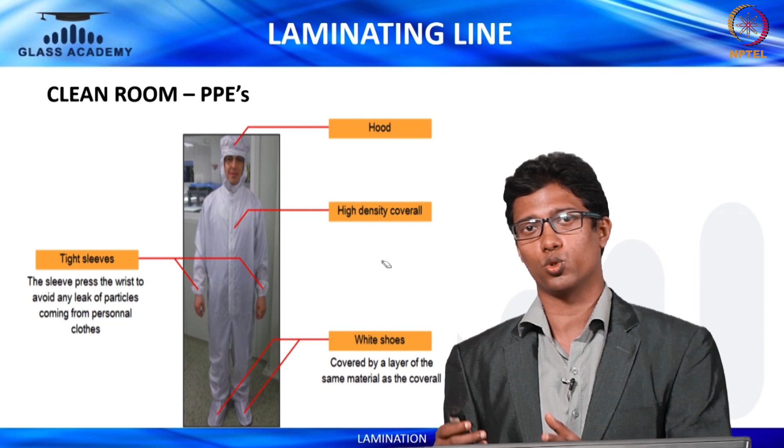Basically what we are trying to convey is we all wear our clothes, and there should be a room where the PPEs are kept. The person goes there, changes and wears that PPE, and then goes inside. It's just a medium before entry into the clean room, trying to ensure we don't contaminate it, since the atmosphere has a lot of dust. This is an arrangement to ensure double protection against contamination of the clean room.

For clean room dust control, we have a standard which is the US Federal 209E standard that we follow. An ideal condition for a clean room is normally ISO Class 7 or Class 10,000, wherein we use this handheld meter, model 3013, shown on the right side.

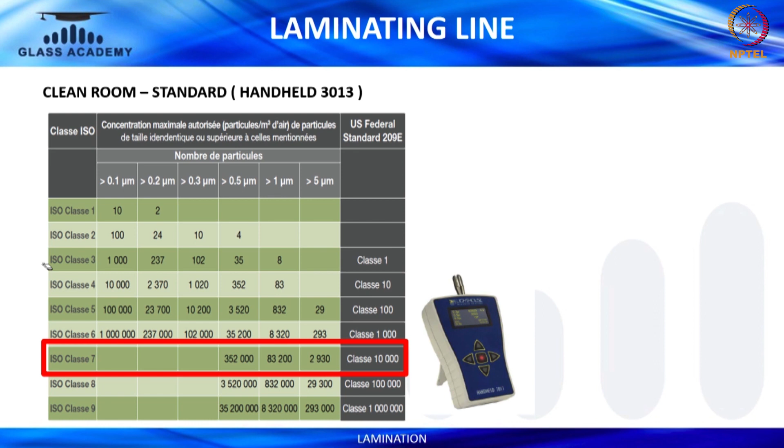You keep this meter in the atmosphere, and when you start it, it measures particles of size 0.5 micron, 1 micron and 5 micron. Normally we recommend running the meter for 20 minutes, and it takes a reading every 1 minute, or it can also take readings every 30 seconds, depending on what you set.

Normally we keep 20-minute readings, taken every 1 minute, and average all those readings. The 0.5 micron particle count should not exceed 3.52 lakhs. For 1 micron particle size, particles greater than 1 micron should not exceed 83,200, and particles greater than 5 micron should not exceed 2930.

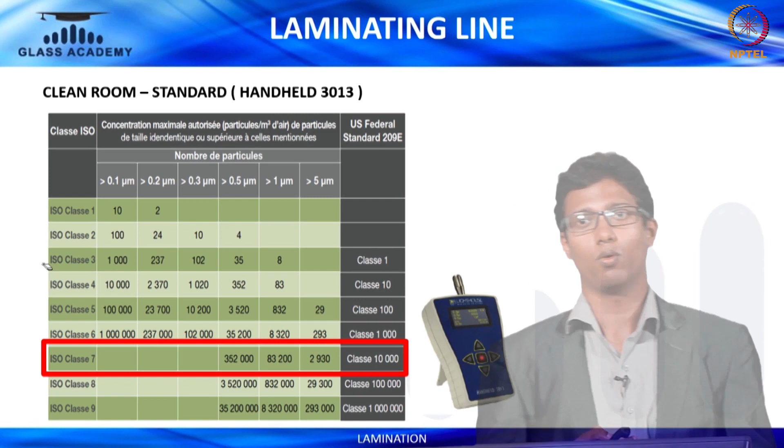This is the standard for maintaining a clean room, and it is also the standard maintained in hospitals and pharma manufacturing setups - ISO Class 7 and Class 10,000 - and this is very significant for the quality of lamination.

Coming to the conditions required for a clean room: you should have a double door entrance. This is to protect the clean room from contamination. Inside this double door you also have a fan which blows onto your body, removing all the impurities settled onto the surface or your cloth, and then you enter inside the clean room. Then you have over pressure in the room.

Normally it is recommended to have a pressure of 15 Pascal in the clean room, so that all the dust from outside doesn't penetrate inside. You have an air filtration system to ensure the clean room remains dust free. You also have special adhesive door mats to remove dust from shoe soles. It is ideal to have dedicated white shoes for the clean room, confined only within its periphery.

Dust is everywhere, so those will also be subjected to some dust. You have adhesive doormats kept at the entrance of the clean room. Where you step in, dust from the shoe soles gets transferred to the doormats. Over time, as the doormats get dirty, you can remove a layer and throw it out. The doormats come in, let's say, 15 layers, and you can keep removing them as they get dirty.

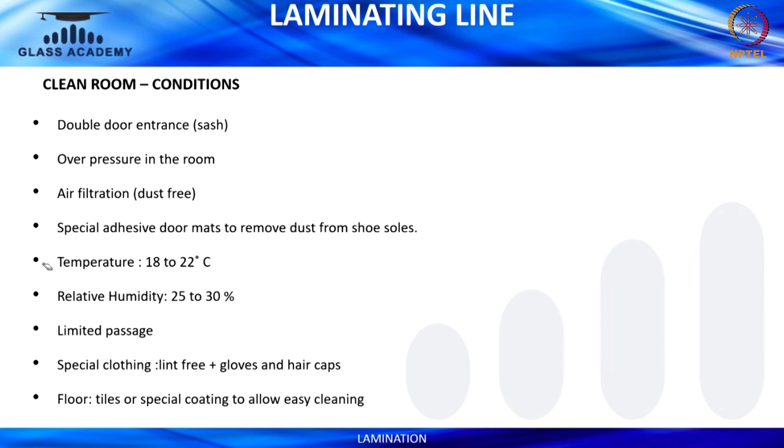A limited passage means you have to restrict the entry and exit of people in and out of the clean room. Only a limited amount of entry and exit should be permitted. That's how you maintain the dust control parameter. Temperature and humidity will fluctuate if you have repeated movement of people in and out. So it's important to not allow too many people, and have a clear cut SOP, standard operating procedure, for people entering the clean room. For visitors, there should be approval letters or authorization permissions allotted before they can enter.

For the clean room, as we saw, there is PPE which was demonstrated earlier. The PPE should be lint free, and people normally wear gloves and hair caps to ensure hair or any impurity doesn't come in contact with the interlayer at the time of assembly, otherwise you will have defects.

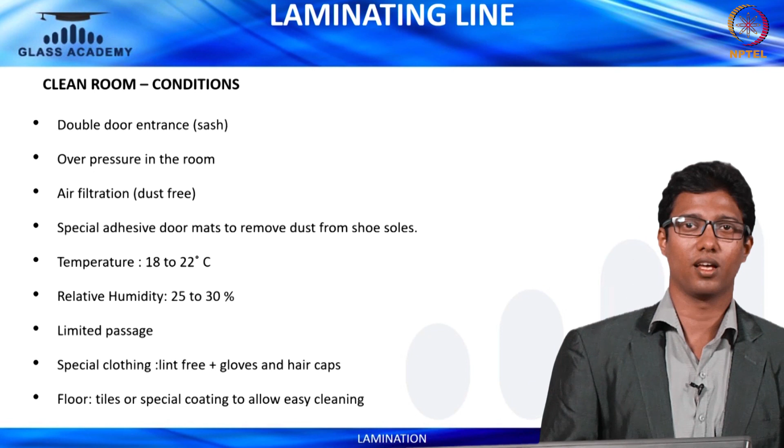The tiles or special coating used for the construction base of the clean room are required for ease of cleaning. Coming to the basics of the clean room, we normally recommend following these 32 points which are required for maintaining cleanliness and ensuring your product comes out of very high quality.

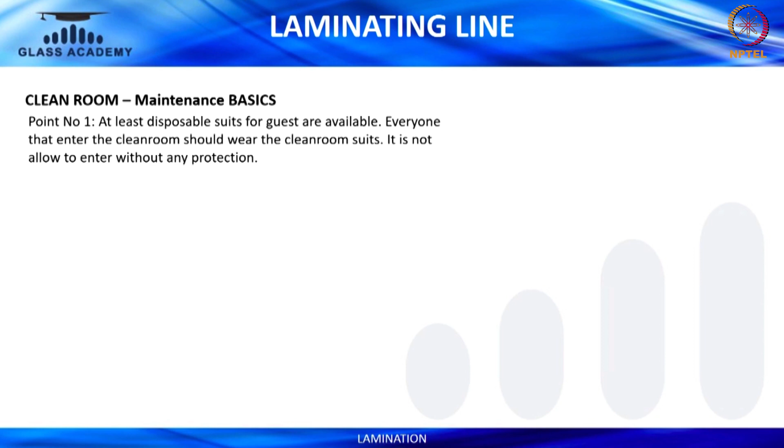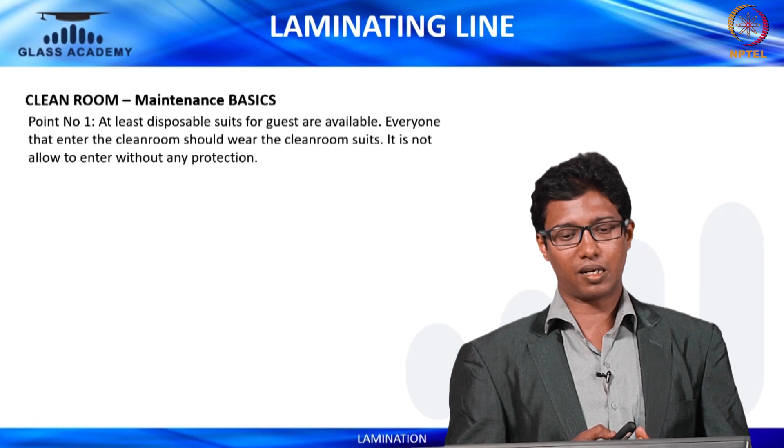Point number 1: you should have disposable suits for guests. As mentioned, PPEs are to be used dedicatedly inside the clean room, and for guests you should have disposable suits so that whenever they enter and exit, it's a one time use. Everyone entering the clean room should wear clean room suits; it is not allowed to enter without protection. This could be a PPE for guests, or disposable suits used for one time and thrown away.

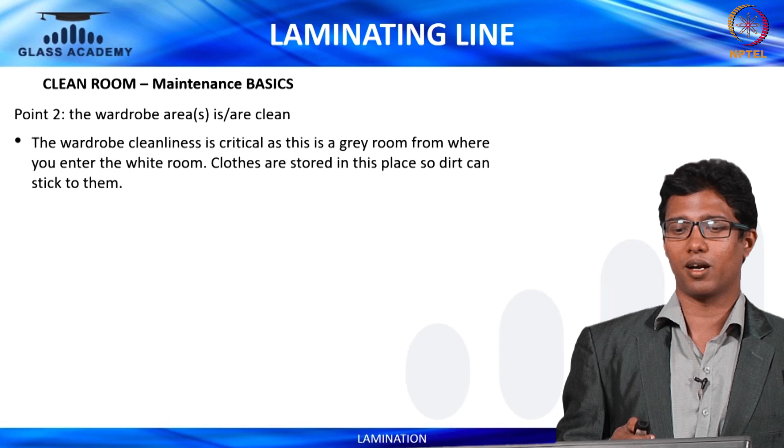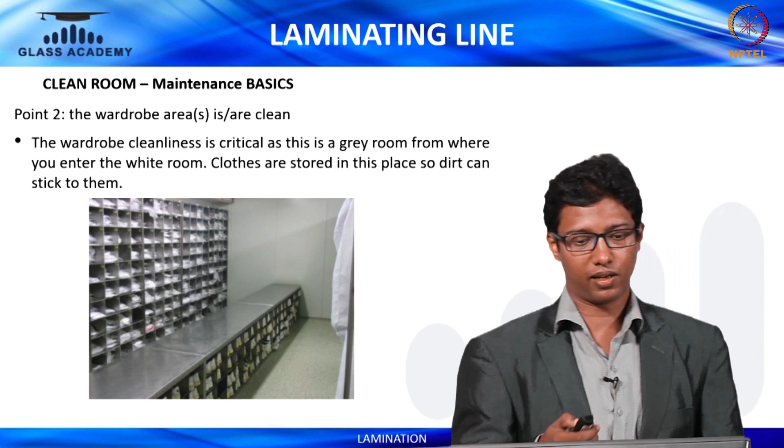Point number 2: the wardrobe area should be clean. Wardrobe cleanliness is critical, as it's a grey room from where you enter the white room. Clothes stored in this place, if dirty, affect cleanliness, so wardrobe cleanliness plays a very important role. As you can see in this picture demonstrating how wardrobes are stored, a very good level of 5S is demonstrated here - everything is identified and kept in its own place.

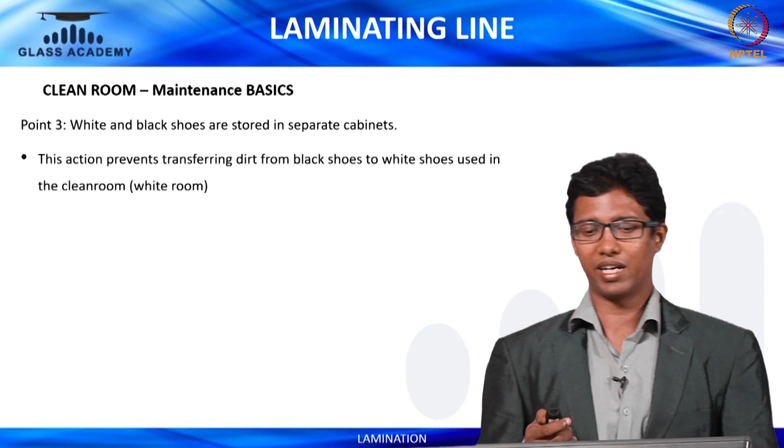Coming to point number 3: white and black shoes are stored in separate cabinets. The black shoes are the safety shoes used in the line, and when you enter, we recommend white canvas shoes for operation in the clean room. These are segregated and kept separately because shoes should be used dedicatedly inside the clean room. This action prevents transferring dirt from black shoes to the white shoes used in the clean room. You can see a picture demonstrating how white and black shoes are segregated in different racks.

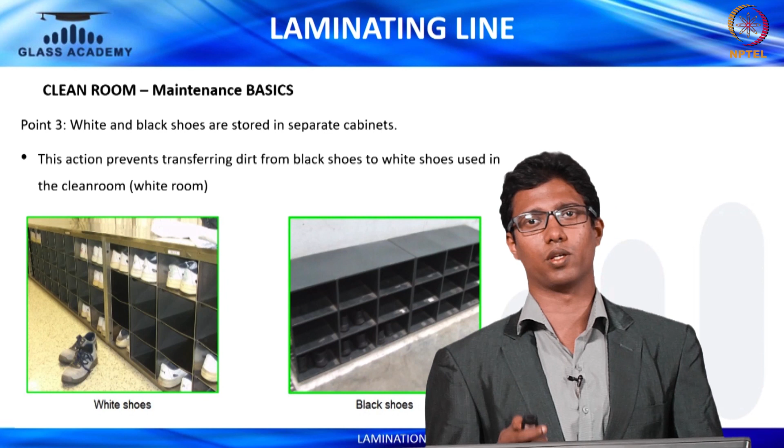Again, a very good demonstration of 5S. And these are very critical when you have to maintain the dust conditions that are required for maintaining a clean room.

Coming to point number 4, instructions of how to wear clothes. That should be available. You should have an SOP, or let's say you can have an instruction which says how the cloth has to be worn and how the condition has to be adhered to. It is not easy to correctly wear the clean room clothes, especially for new workers and guests. That is why the manual or the SOP for wearing clothes becomes mandatory.

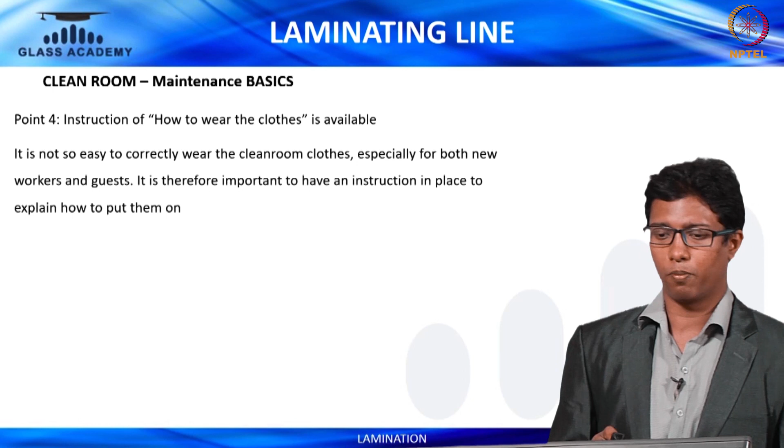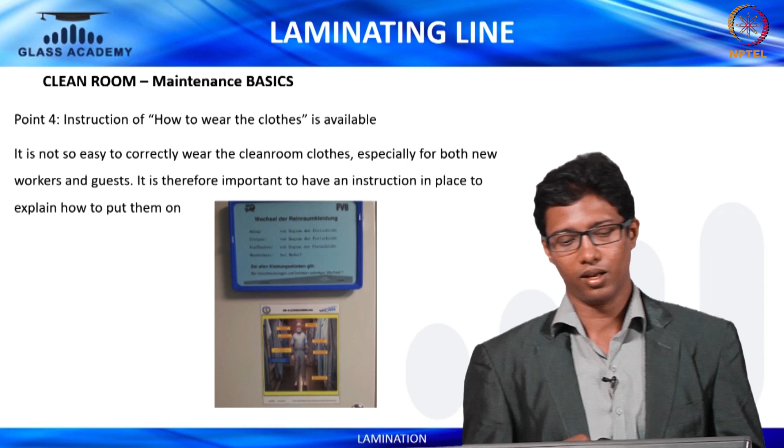Therefore, it is important to have an instruction in place to explain to them how to wear the clothes. So, this is a demonstration of how PPE is worn, and this is for visitors or people who are coming in and who are new to the system.

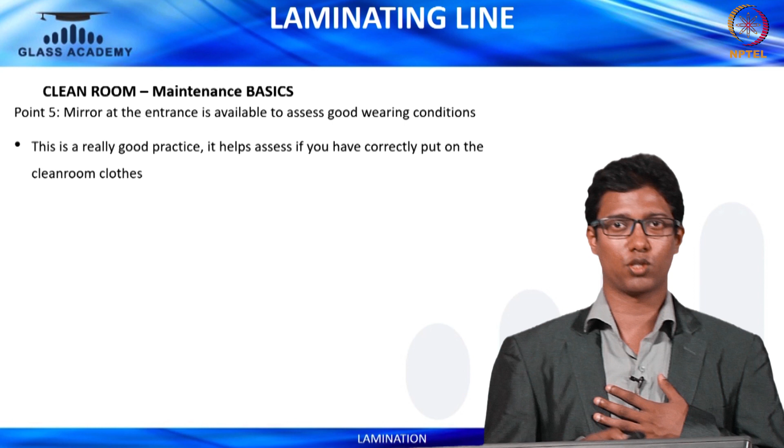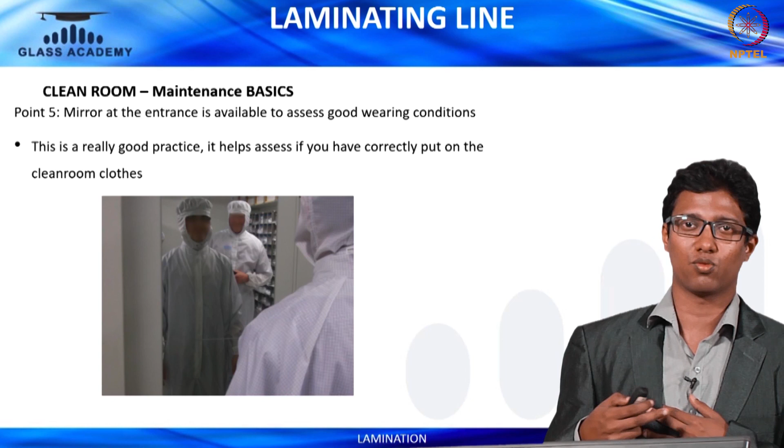Coming to point number 5, a mirror at the entrance should be available. It's basically to ensure whether the person who just finished wearing the PPE has worn it properly or not. So, it's just a good practice, and it ensures the person can see himself in the mirror and can be satisfied that he has worn it properly, or if something is to be corrected, those can be corrected.

The sticky mats on the floor at the entrances are existing. As we mentioned, the shoe soles get dirty over a period, so it is to ensure that the dirt from the soles is not contaminating the clean room. You have sticky mats at the entry of the clean room, wherein people can step on the mats and then enter the clean room.

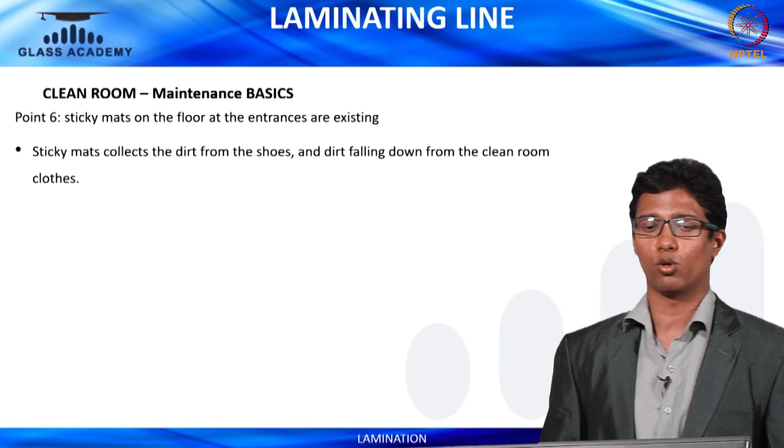So, the sticky mats basically collect the dirt from the shoes and the dirt falling from the clean room clothes. So, this is how a sticky mat looks; you can see the one on the left hand side of the picture, where the blue colored ones are the sticky mats, which basically take the dirt from the soles and the body.

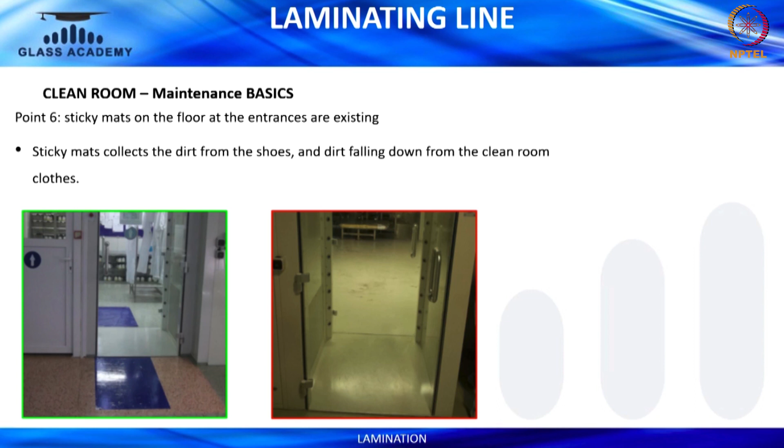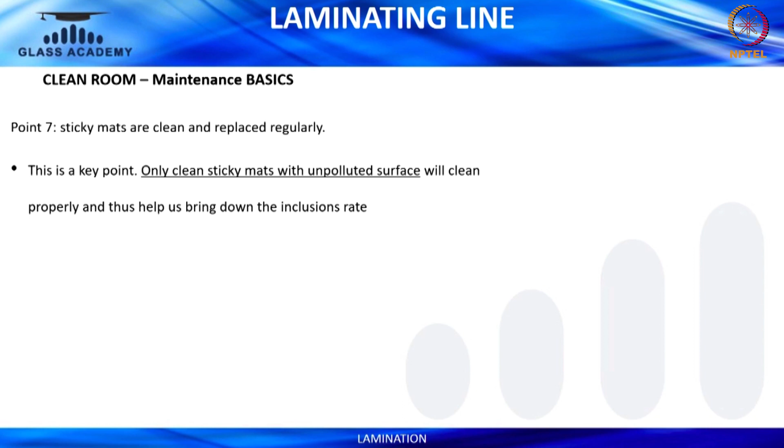Coming to point number 7, sticky mats, again, over a period of time keep collecting the dirt from the soles. They will get dirty, so it is important to have an SOP which clearly states at what frequency the sticky mats have to be replaced. So, only clean sticky mats with an unpolluted surface will clean properly, and thus help us bring down the inclusion rate.

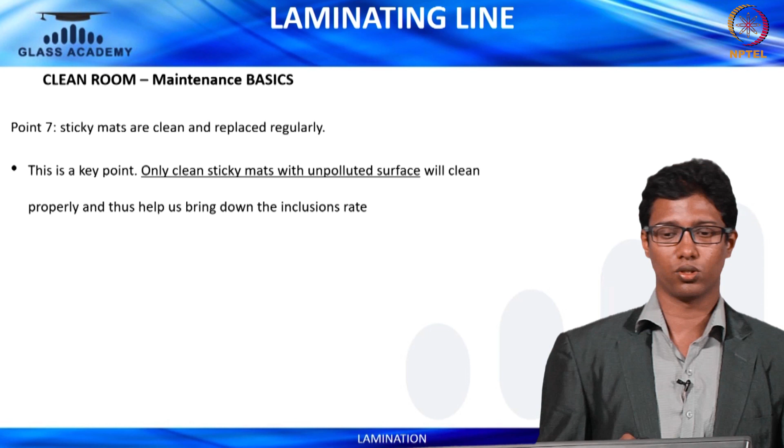So, it is important that at a regular interval, based on the dirt collection of the mats and based on the frequency at which the mats get dirty, we make an SOP and ensure that the mats are replaced. So, the pictures again demonstrate the dirt collected by the sticky mats.

You can see the ones on the right hand side are dirty, and as soon as you see a lot of dirt on the sticky mats, it's important that you take off the layer and replace it with a new layer which is clean, which again starts collecting the dirt.

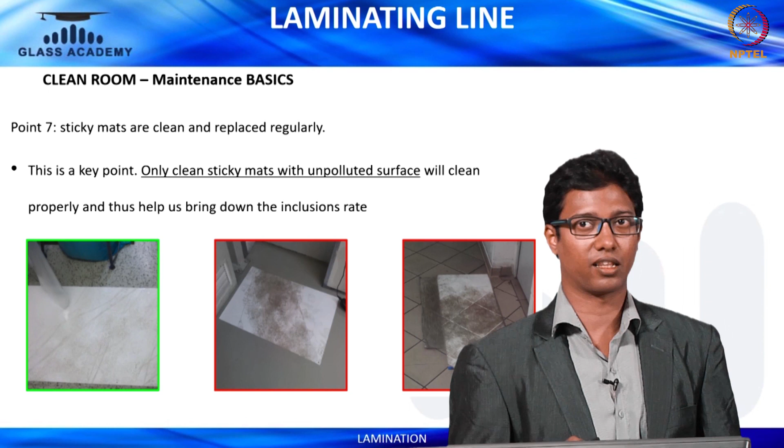So, point number 8 is there should be a cleaning schedule. Basically, it's again a part of 5S, as well as to maintain the standards of the clean room. It is important that you have a cleaning schedule. So, the cleaning schedule should contain information of who, when and how the room is to be cleaned. Basically, it will give the person responsibility.

It also gives you the time frame or the frequency as to when the rooms will be cleaned, and it will also tell you a procedure, a standard operating procedure of what is to be used and how it is to be used. So, it can be combined with a record list or maybe a checklist after each cleaning, for the operator to ensure that it has happened properly and there is proper monitoring of it. You can have a checklist in which the operator is signing. So, the operator can sign it.

The clean room should be cleaned regularly at a defined frequency. Maybe for different parts of cleaning, you can have a different frequency. Like we see, at the end of each shift, the ground must be cleaned and bins must be emptied. At the end of each week, cranes, glass conveyors, rollers, and vacuum cups must be cleaned. At the end of each month, a complete cleaning of the room must be performed, always from top to bottom, as the dust settles at the bottom.

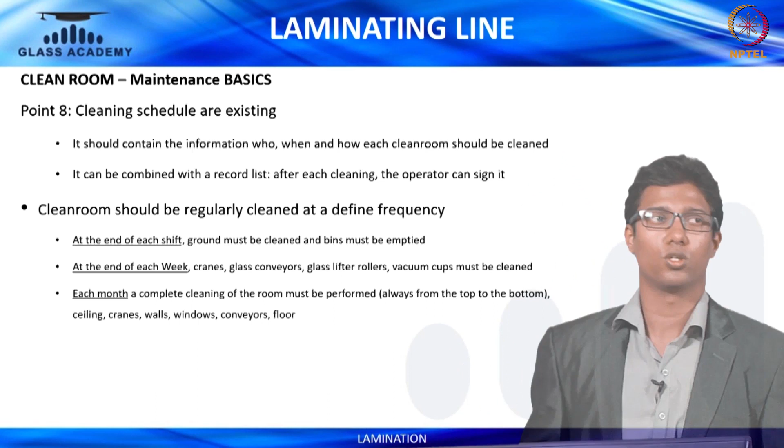Ceiling cranes, walls, windows, conveyors and floors. So, as you see, we have 3 different frequencies defined: every shift frequency, week frequency and month frequency for, let us say, the bins, the conveyors and also the walls and other parts of the clean room, and the checklist which is maintained for ensuring that the cleaning has happened, just for documentation, and also for making it happen.

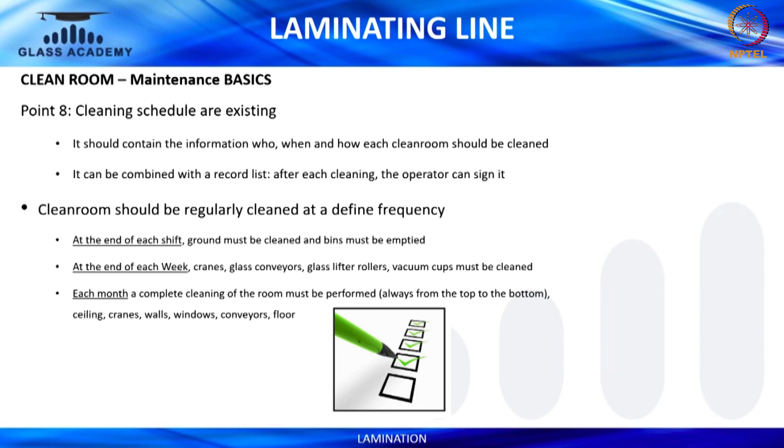Coming to point number 9, the cleaning instructions are prepared and available. Otherwise it is not clear how to clean the process line or walls with proper tools. That is why these instructions are mandatory. Basically you have different tools for cleaning: mops, tissues, sticky rolls, water, etc. So, it is important that there is a procedure which tells you how those are to be used, and what are the do's and don'ts when we talk about clean room cleanliness.

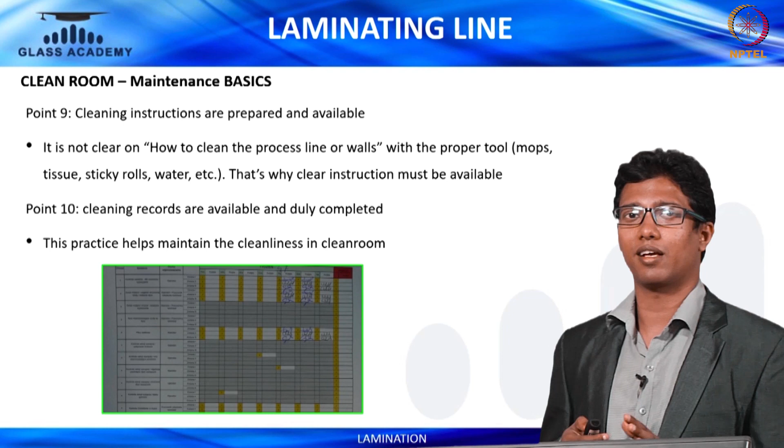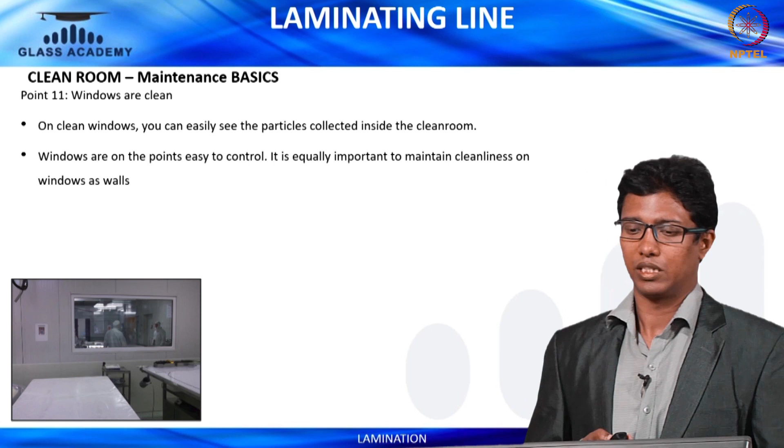And then you have point number 10, cleaning records are available and duly completed. Basically we are trying to ensure that the cleanliness of the room is maintained properly, so that we have a proper check sheet and ensure that you are following everything as per the frequency that you have defined. Point 11, windows are clean. This is again a point which is to be ensured. On clean windows, you can easily see the particles collected inside the clean room. Windows are easy to control. It's equally important to maintain cleanliness on windows as walls.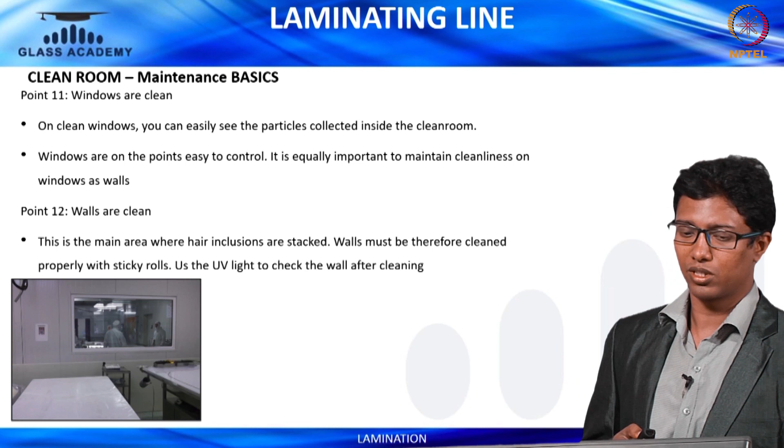Point number 12, walls are clean. It's important to ensure this, as this is the main area where hair inclusions are stuck. Basically the inclusions coming from the air are stuck onto the walls. The walls must therefore be cleaned properly with sticky rolls. The sticky roll is applied onto the walls of the clean room, and it catches the hair and other inclusions which are stuck onto the surface.

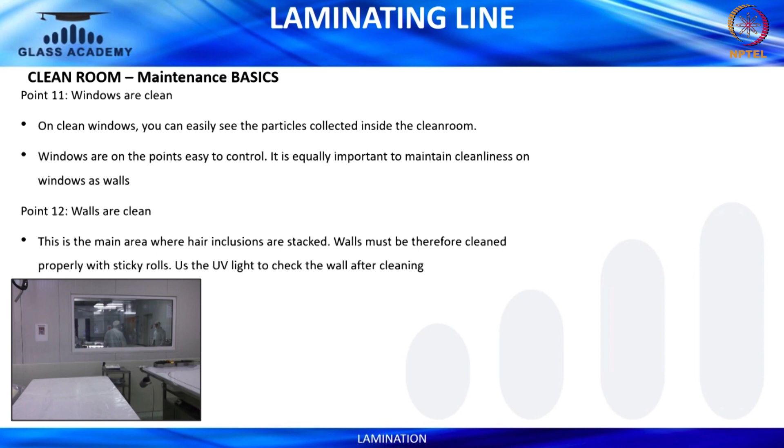We also use UV light to check the wall after cleaning, just to ensure that there is no other foreign material, and if there is any, again we use a sticky roll on the surface and try to collect it, just to ensure that the entire body of the room is properly maintained. You can see some of the impurities on the walls, so those can be removed.

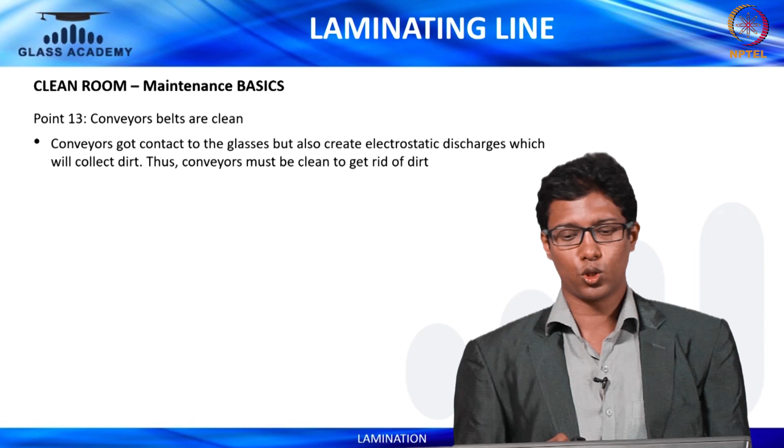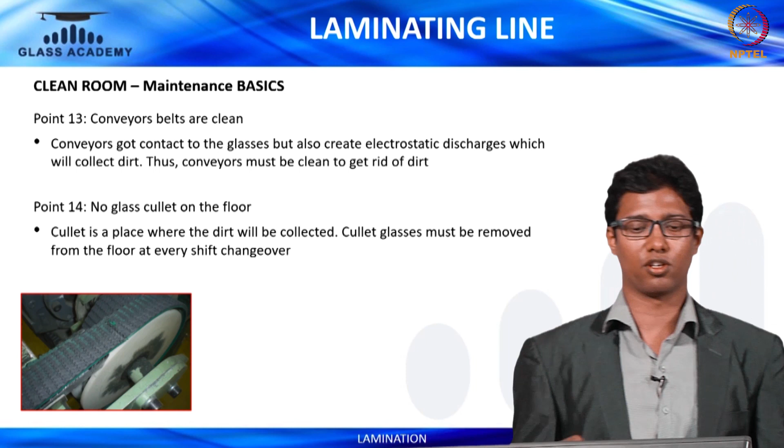Point number 14, no glass cullet on the floor. Cullet is basically glass particles which are there on the floor, and it is a place where dirt will be collected. Cullet glass must be removed from the floor at every shift changeover. Again we are trying to ensure that at a frequency of every shift all the cullet and impurities collected on the floor are removed.

Point number 15, no PVB sheets or PVB foil on the floor, and no PVB rolls are unprotected. The floor can have a little bit of dust, and when PVB comes in contact with the floor, it can absorb the dust particles, which will not be visible to the naked eye. You do the layup and further processing, and over a period of time it might lead to issues with adhesion, and subsequently it can also lead to delamination.

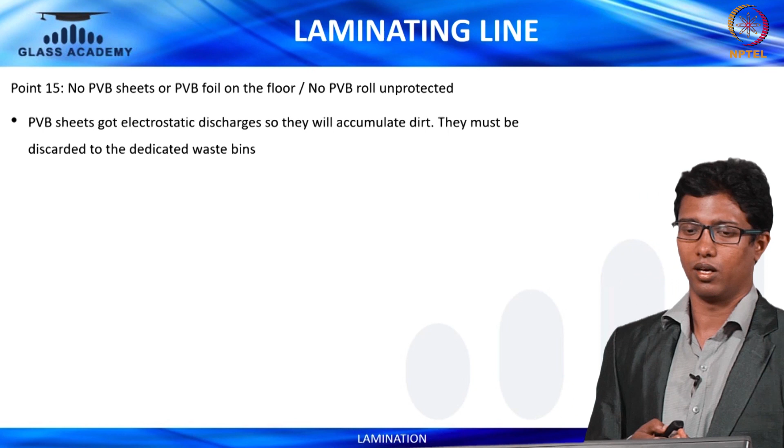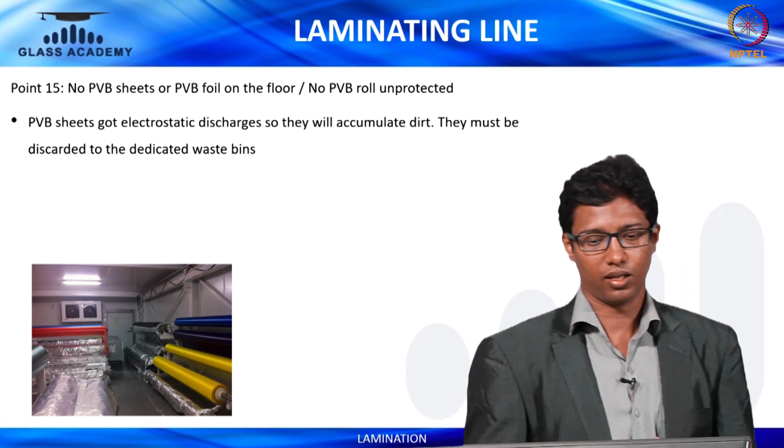And again PVB sheets have electrostatic discharges, so they will accumulate dirt. They must be discarded to the dedicated waste bins. PVB sheets which have accumulated dust, it's important that you don't use them and you discard them to the waste bins. You can see that most of the rolls are protected using aluminum foil. The protection is also important because PVB is hygroscopic, so you ensure the moisture levels are maintained and you do not expose it to improper conditions. Point number 16, the floors are in good condition and free from dust.

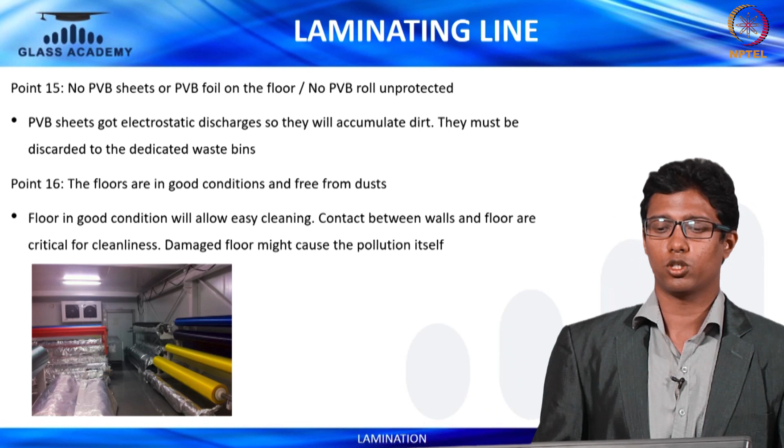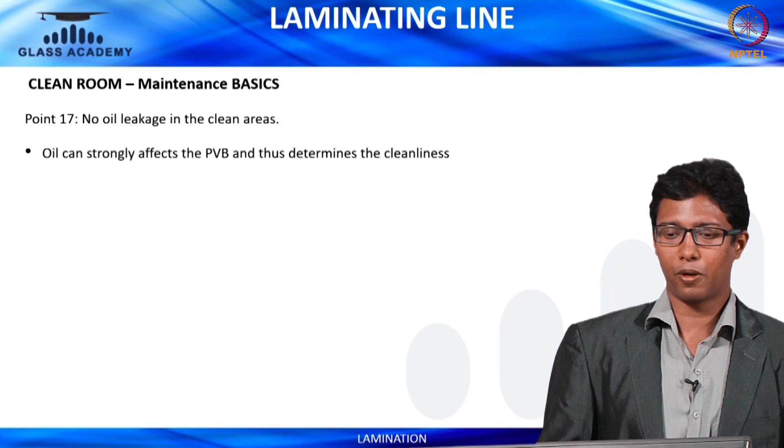Point number 17, there should not be any oil leakage in the clean room or the clean areas. Oil can strongly affect the PVB, and thus the cleanliness is very important. Again it is a form of contamination, and when PVB comes in contact with oil, the adhesion is deeply affected.

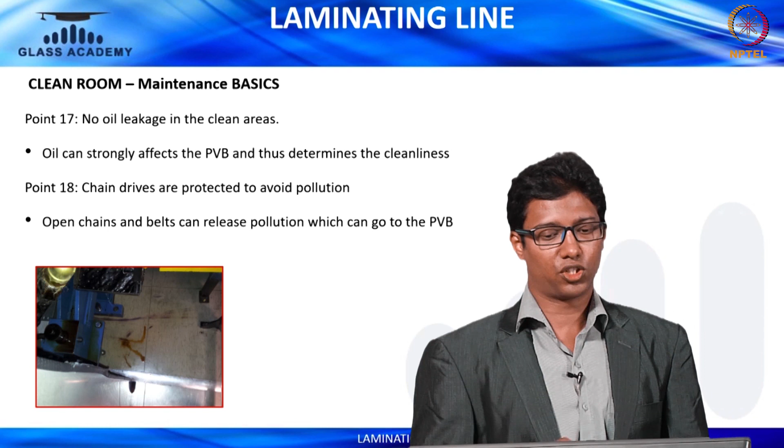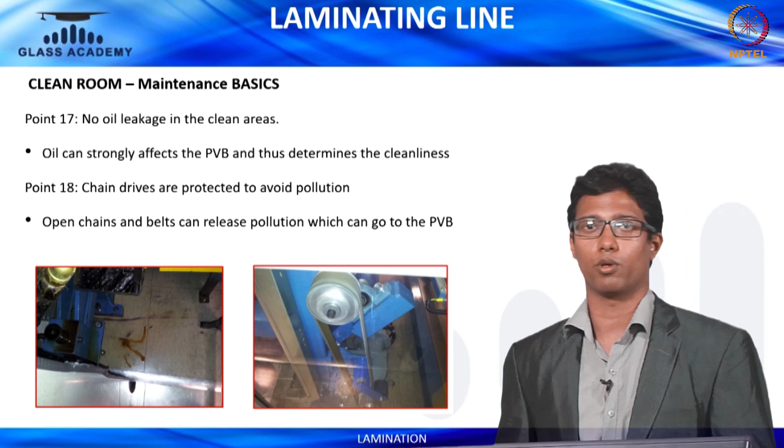Chain drives are protected to avoid pollution. Open chains and belts can release pollution which can come in contact with the PVB. Again it is important that all those chains and belts are protected and nothing comes in contact with the PVB.

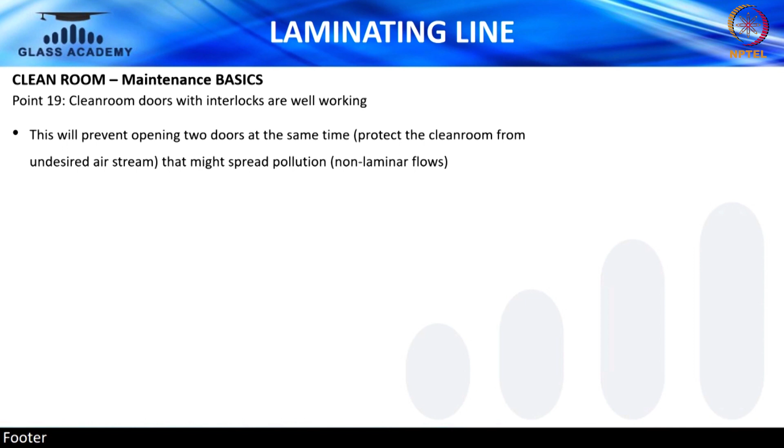Point number 19, clean room doors with interlocks are working. So basically this will prevent opening two doors at the same time. We talked about double door entry. So when the main door from where you enter the clean room is open, the other door should be closed, so that you are not allowing any dust or impurity from outside of the clean room to enter.

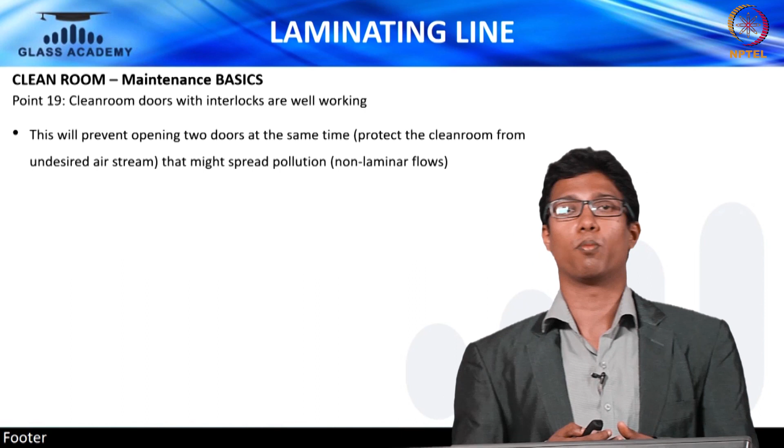So there should be an interlock so that if one door is open, the other door does not open. That is what we are talking about, just to ensure that there is no contamination happening in the clean room. This will prevent opening two doors at the same time and protect the clean room from undesired airstream that might spread pollution. So interlocks are very important.

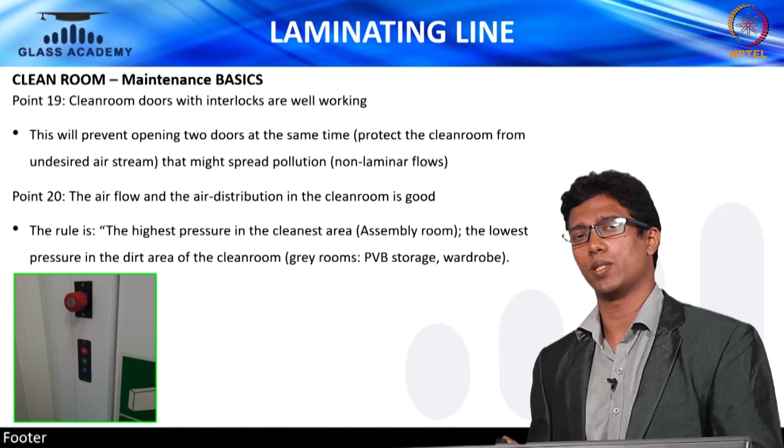Point number 20, the airflow and the air distribution in the clean room is good. It is important. The rule is the highest pressure in the cleanest area, the assembly, and the lower pressure in the dirty area, which is the grey room, and subsequently outside. So normally we maintain a positive pressure of 15 Pascal compared to the pressure reference, and this is important so that the undesired airstream from outside causing contamination doesn't enter the clean room where we are doing the assembly.

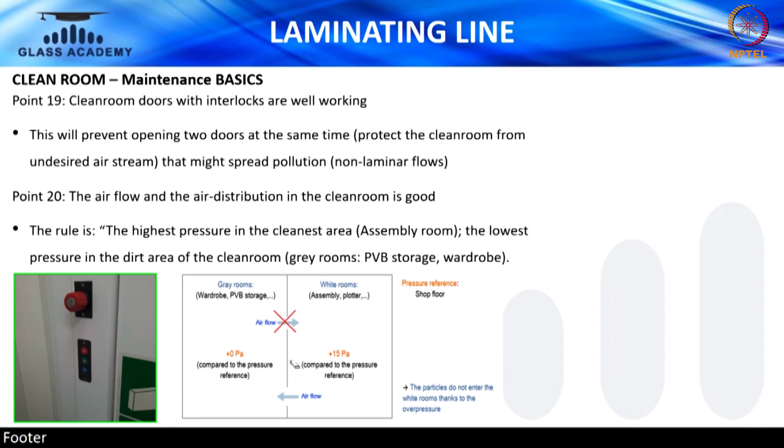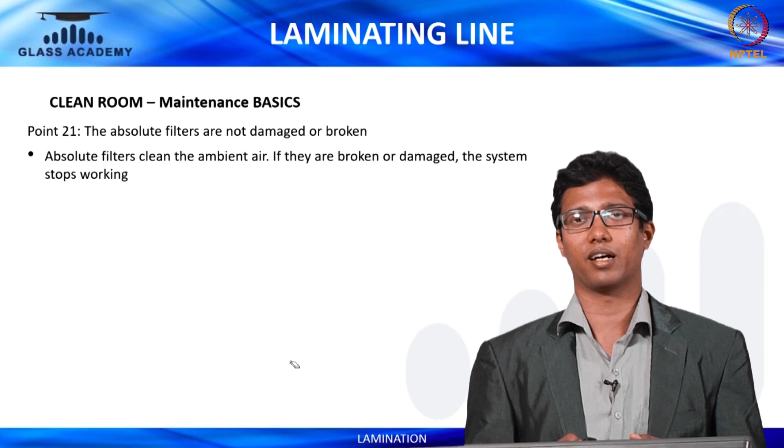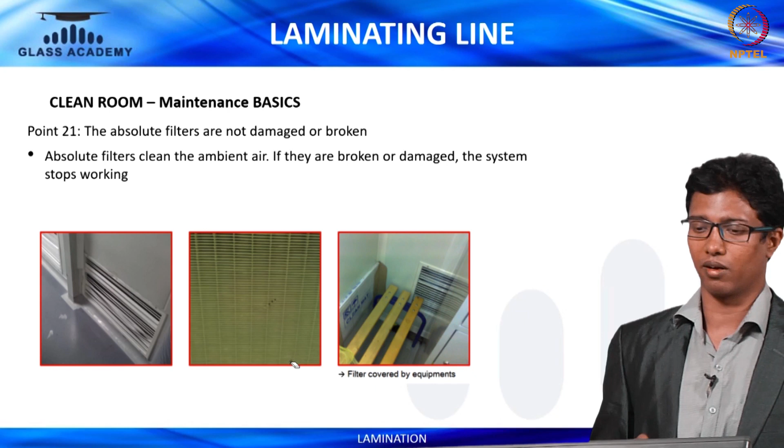Point number 21, the absolute filters are not damaged or broken. It is important that the absolute filters are clean, since they clean the ambient air. If they are broken or damaged, the system stops working and the airflow is affected, and again you will have issues. So it is important that time and again we keep checking whether the absolute filters are in good condition. If they are dirty, they are cleaned, and if they are broken, they are replaced.

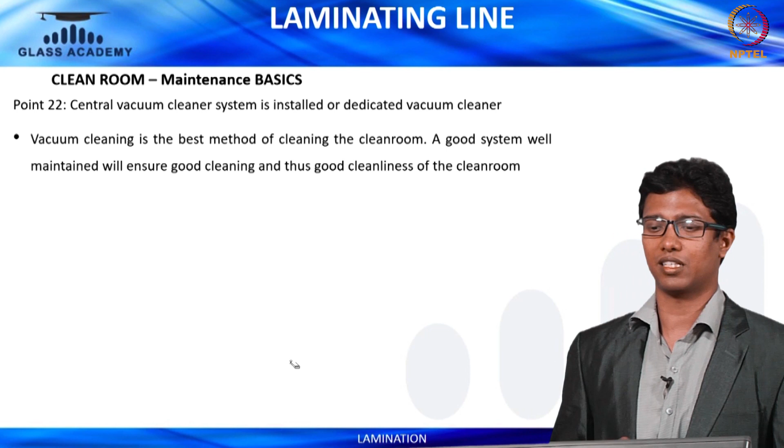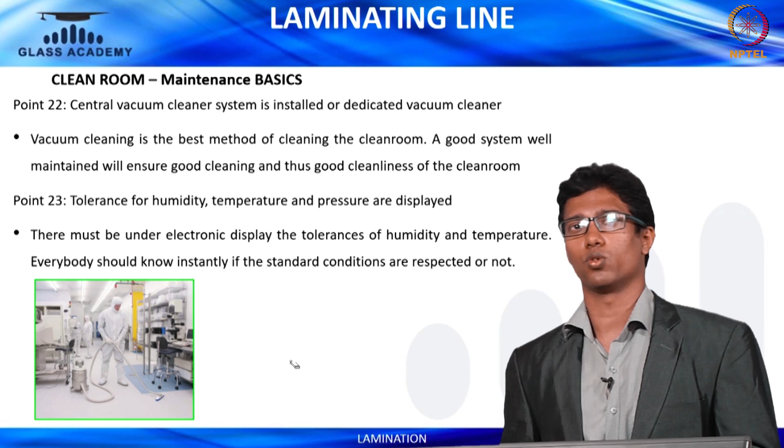Point number 23, tolerances for humidity, temperature and pressure are displayed. So those are the three controls for maintaining the clean room, and those are very critical from the point of view of processing quality. There should be some indicator displayed which gives you the tolerance, and everybody should know instantly if the standard conditions are respected or not. If they are respected, you go ahead and process. If they are not respected, you raise an alarm, stop, and ensure that those are rectified before you continue.

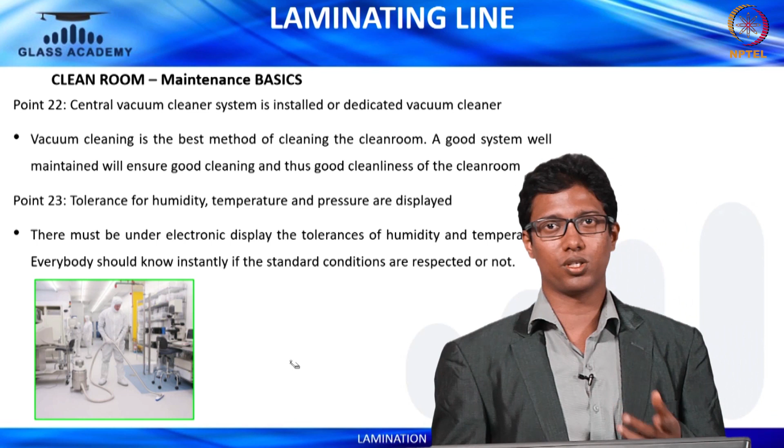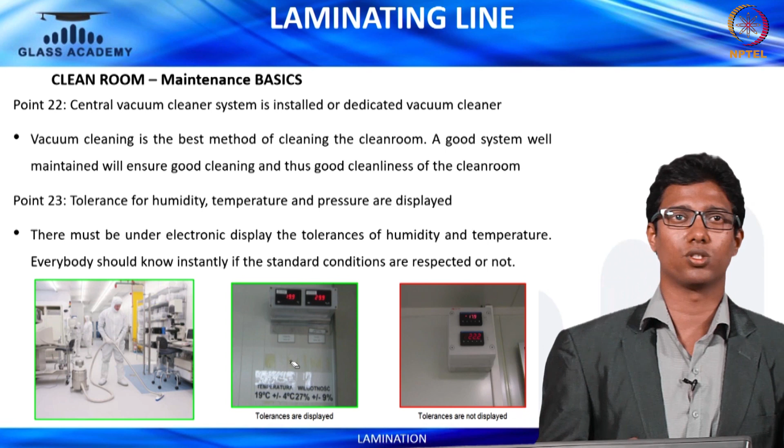So you can see a picture which is giving you the tolerance. So 19 degrees plus or minus 4, just an example, you do not have to take it literally. But what we are trying to show is basically there is a display which gives you the tolerance, as well as an indicator which is indicating the actuals. So from the actuals and the display you can see whether those are respected, and you can go ahead with the process.

Point number 24, there is no unnecessary equipment in the clean room area. General 5S: unnecessary material will accumulate dirt that can be easily released in case of air streams.

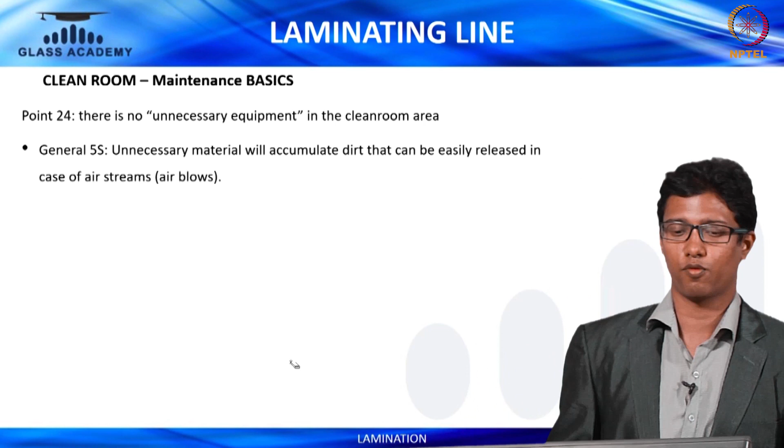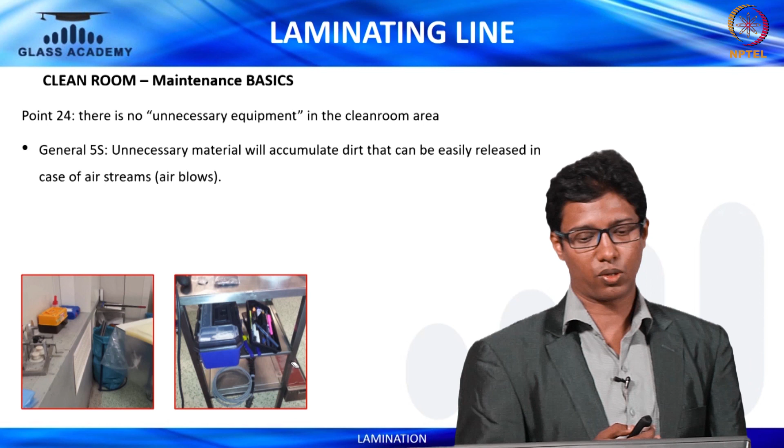So, the 5S again is very important. So, you should ensure that the 1S, which is basically SEIRI, which talks about unnecessary unwanted items, segregation and being removed subsequently, those are maintained properly.

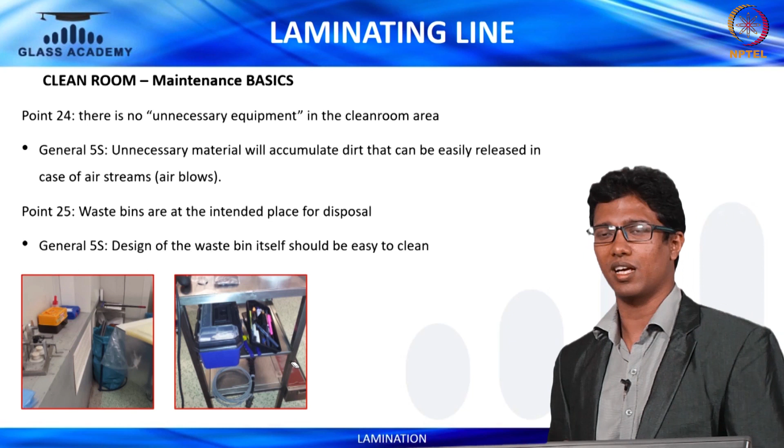Point number 25, waste bins are at the intended place for disposal. As you have a lot of waste accumulating and you are segregating, you should have a bin where we are trying to dispose of the waste. So, bins are necessary. Design of the waste bin itself should be easy to clean. All the material that is used within the periphery of the clean room is to be designed in such a way that cleaning is also very easy.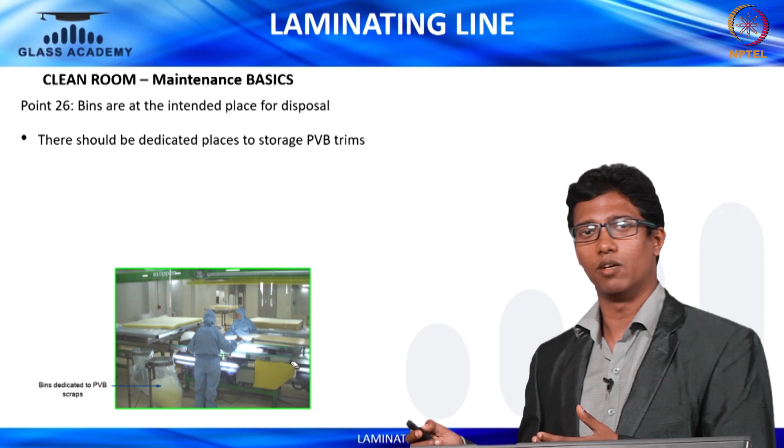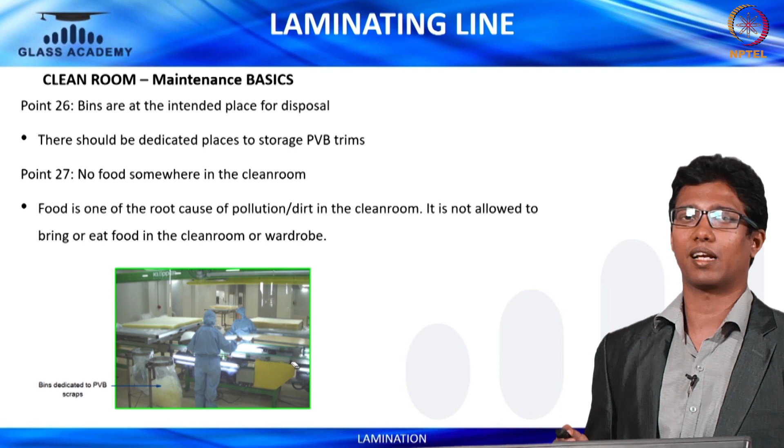Point number 26, bins are at intended place for disposal. There should be a dedicated place for storage of PVB trims. So, when you are doing the trimming of the PVB, you would always get small trims of the PVB, as the yield will never be 100%. So, those trims should have a place to dispose of them, either to scrap or for recycling, but those are to be collected in a separate bin.

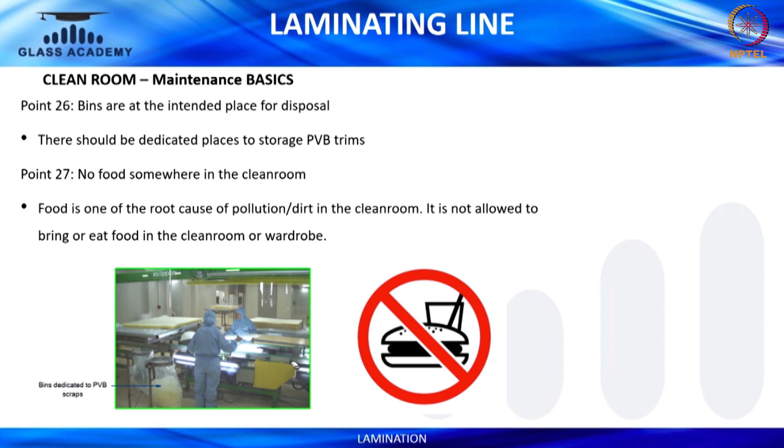Point number 27, no food items should be used inside the clean room. Food is one of the root causes of pollution or dirt in the clean room. It is not allowed to bring or eat any food inside the clean room, and you should not even keep any food items in your wardrobe. Those will end up contaminating the clean room. Point number 28, no private stuff in the clean room. Private stuff again can bring in pollution and contaminate the clean room.

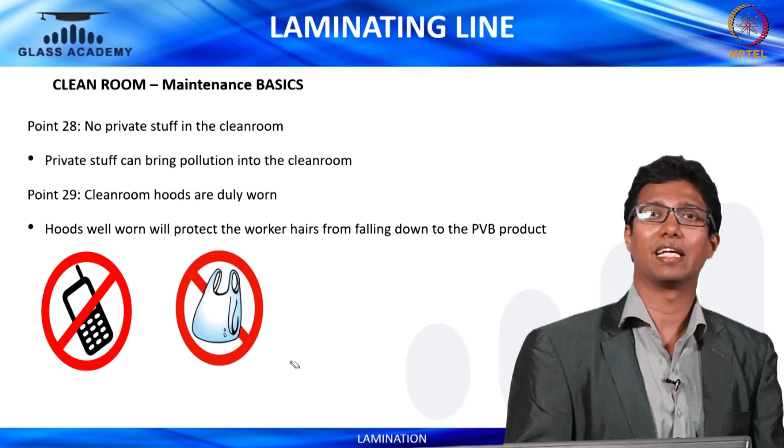Point number 29, clean room hoods are duly worn. As we saw in the initial PPE drawing, hoods are basically protecting the hair. They ensure that hair particles are not coming in contact with the PVB, and thus hoods well worn will protect the workers' hair from falling onto the PVB product. You can have skull caps as well. If the hoods are not there, you can ensure that the workers are wearing skull caps so the hair is not falling.

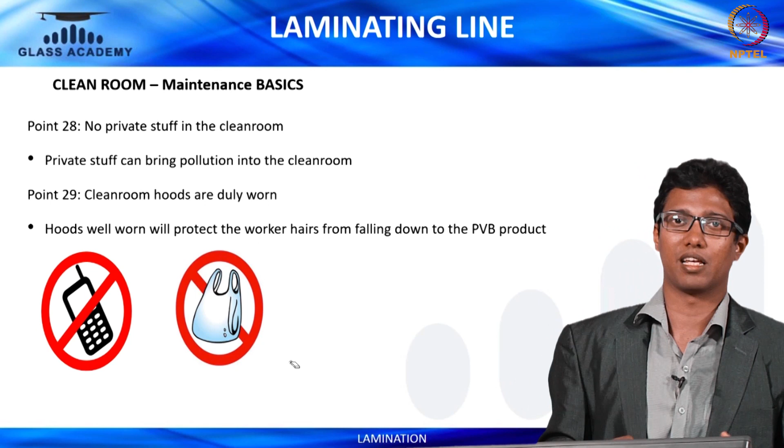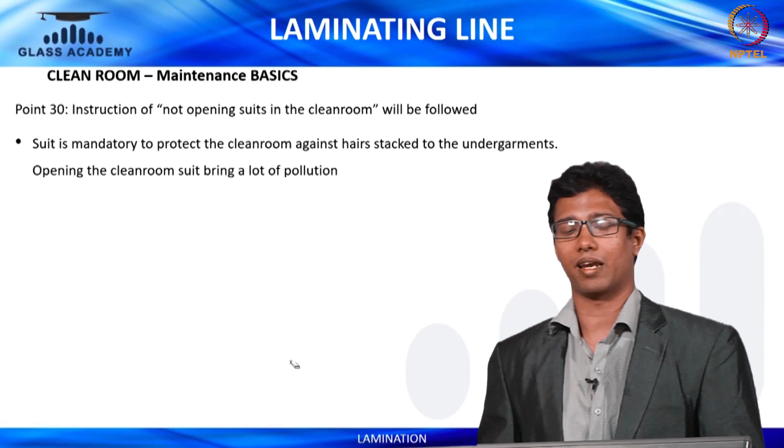Point number 30, instructions of not opening suits in the clean room will be followed. The suit is mandatory to protect the clean room against hair stuck to the undergarments. Opening the clean room suits will again bring a lot of pollution. So, you have to ensure that the suits are fully covered and don't give any openings for the clothes that you wear to contaminate.

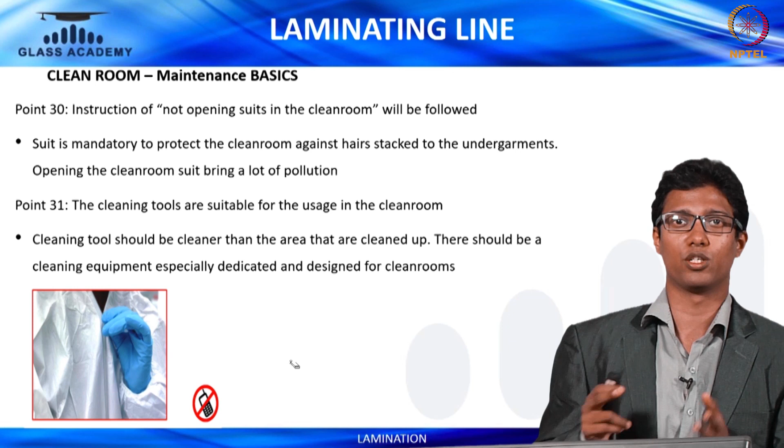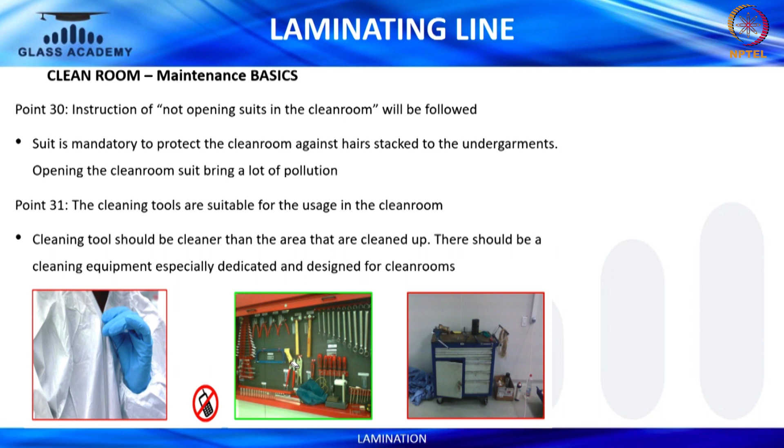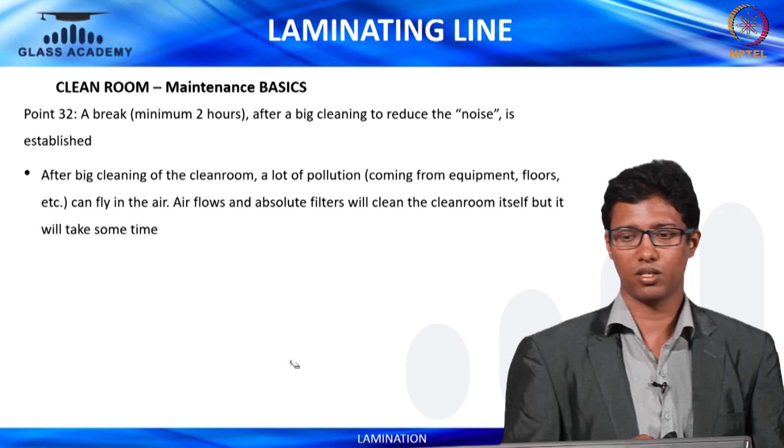Point 32, a break of minimum 2 hours after a big cleaning, which normally is recommended on a monthly basis, to reduce the noise is established. After big cleaning of the clean room, a lot of pollution coming from equipment can fly in the air. Air flows and absolute filters will clean the clean room itself, but it will take a little bit of time. That is why we recommend a break period of 2 hours before you resume production after any big cleaning of the clean room.